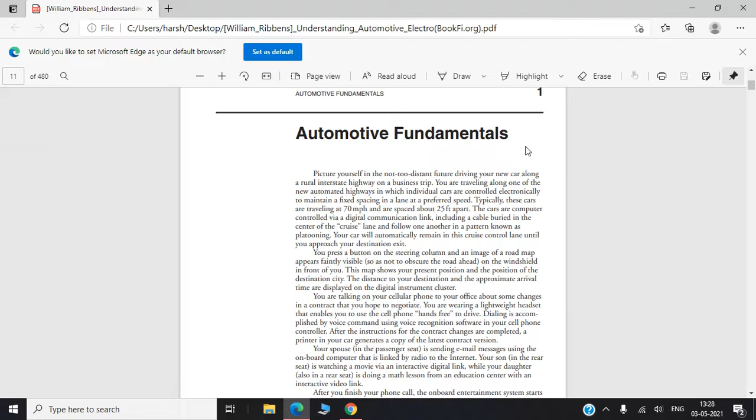So the first part is just the introduction and how the car actually evolved. We'll see a small video now showing the evolution of the car, and the first car which was actually fabricated in the year 1886 by Benz - a person named Benz. You must be knowing about the Benz car, right? Mercedes Benz. The same person actually fabricated the first car, and we'll see the replica of the car here, as well as the evolution of the car from the first car till the latest modern car.

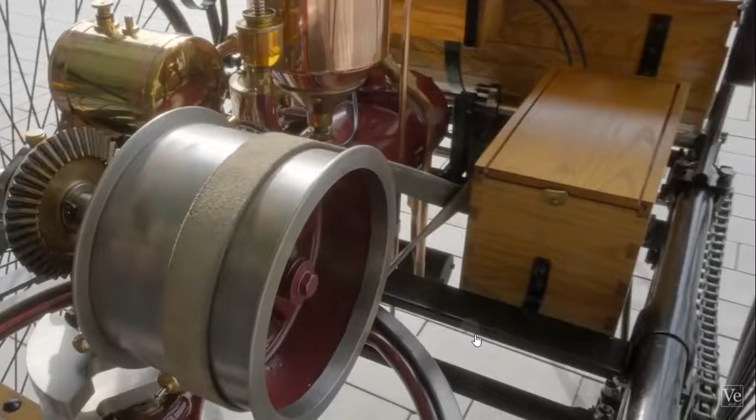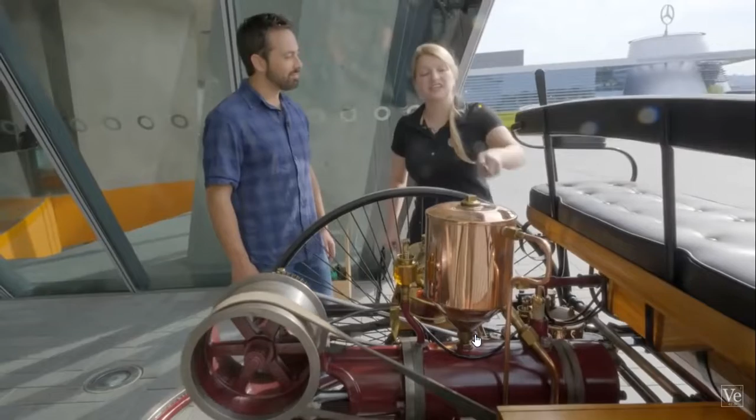Invented by Carl Benz, patented in 1886. Of course, this is not the real thing - this is a replica, because the first model didn't survive. To make a video about car safety - right, there's not a lot of safety here. Safety would come later. As you can see, it is almost like a carriage - I'm myself driving the world's first motor vehicle. When he made his patent, what did he call this invention? Patent motor car. This is the gasoline tank. The only place in Germany where you could actually buy Ligroin or gasoline back then were pharmacies. They sold it not as a cough medicine, don't worry - they sold it as a stain remover, a washing agent. In Germany there's still the word Waschbenzin, washing gasoline, but no one really knows why it's called like that. Benz had a real thing for safety - his ignition is a really modern one, because inside there's a battery, which was fairly new back then. And of course, igniting the gasoline oxygen fumes with an electric spark is much safer than if you try to ignite the whole thing with a lighter. Let's say the most important part is the cylinder with the piston, and the piston moves front and back.

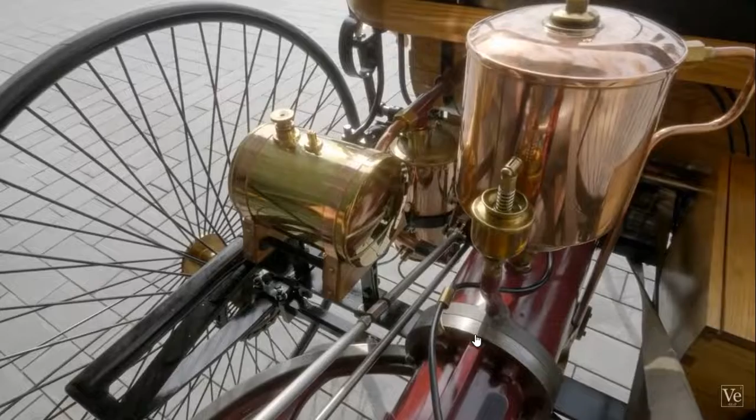This is the piston here, which is still there in current automobiles. And of course, what's really important is the oil reservoir. Lubrication is really important, because everything's open here, so all the time you lose a lot of oil.

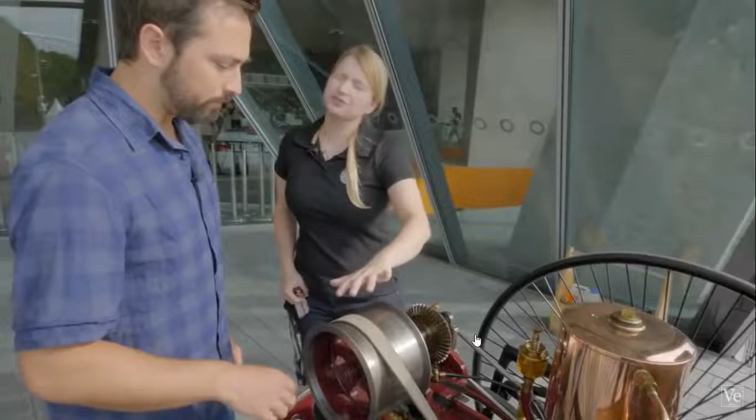And for my colleagues, it's always a big fuss cleaning this up. This is the drive belt. It's not just a drive belt, it's also your brake. It's leather, so if you brake a lot, you get problems with the leather band. The flywheel here, we need for the ignition, to start it. So this is how you started it. Nowadays we have a button as well as a key, right? So this is how the first automobile was started.

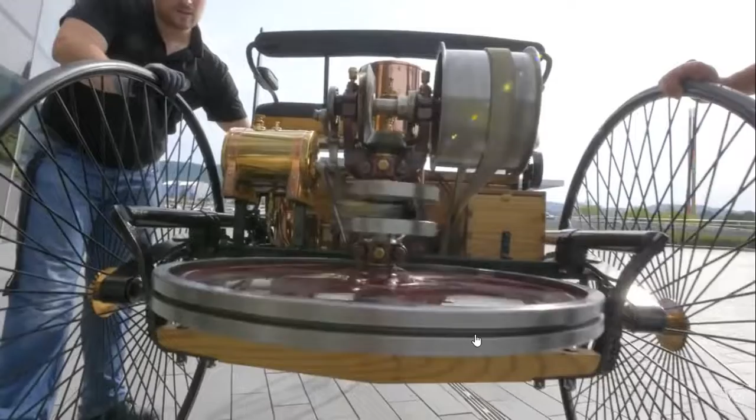Okay, see, that's really simple. We don't have a lot of stuff here. There's just the steering crank, and this is our gas and our brake. Okay, you're moving us into gear? Whoa, this does feel fast. Oh, it even goes.

There was no protection, no safety at all. The top speed of this vehicle was about 16 kilometers per hour, or 10 miles an hour. We can go fast. It feels faster than I was expecting.

This is the Mercedes-Benz museum. The first car was in 1886. Just 16 years later, this car could go 80 kilometers per hour. The second came in 1902 and could already go... by 1928, cars had gotten incredibly fast, reaching speeds up to 192 kilometers per hour.

This car right here set a record of 432.7 kilometers per hour. That's almost 270 miles per hour. And another driver trying to beat that record died the same day. To this day, no one has beat that car's record on a public road.

The automobile revolutionized transportation. It allowed people to travel faster than ever before. But that also created a really difficult physics problem: if you're moving fast and you need to stop or you hit something, you have to decelerate incredibly rapidly, and that creates huge forces on the people inside the car, causing injury and sometimes death.

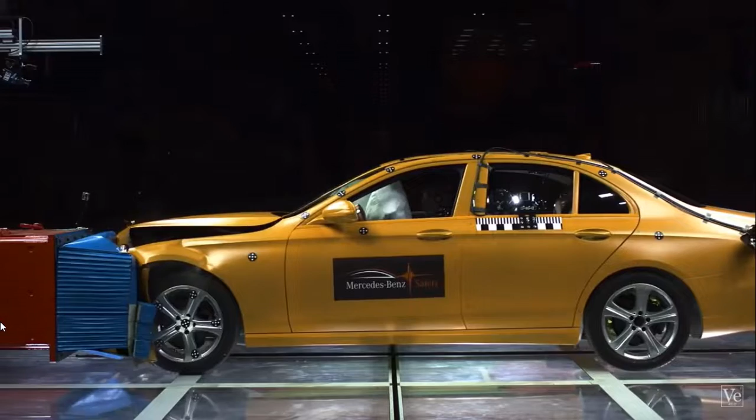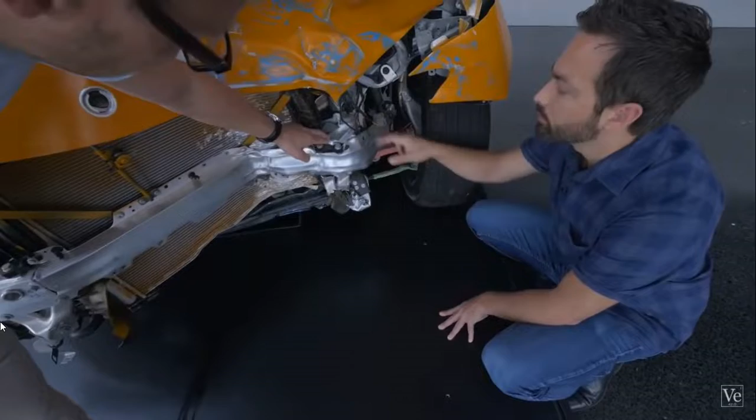This vehicle has done a 64 km/h crash, frontal impact, against a deformable barrier. This is what we classically call the crumple zone. But it's this beam here that's designed to crumple? Exactly, so this takes away a lot of energy by crumpling. The passenger compartment itself is designed with different steel qualities, high strength and ultra high strength materials, so that it gets stiffer and stiffer the closer you get to the passenger compartment.

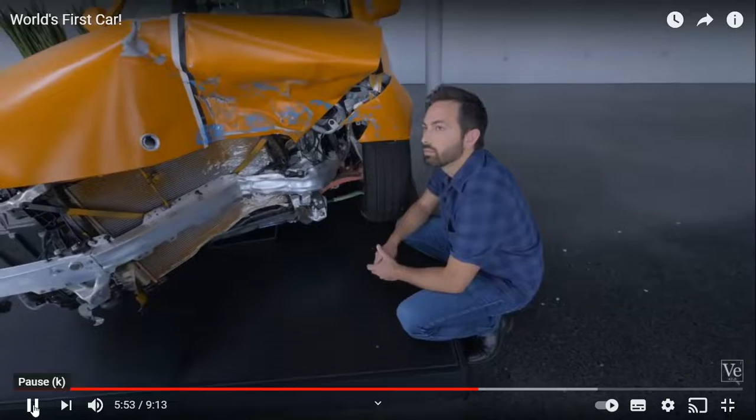One of the biggest challenges for car safety is Newton's first law, which states that whatever is moving at a constant speed will tend to maintain that speed. So if a car hits something, the people inside maintain their constant speed, fly through the windshield, and suffer a very high deceleration when they hit the road.

This is why seatbelts are so important. They ensure that you stay in the vehicle and decelerate with it. When seatbelts were originally introduced, they were an option you could pay extra for. But once we realized how useful they are and how they save lives, they became standard, and now they are mandatory.

Airbags were made available by Mercedes-Benz for the first time in a series production car in 1981. Again, the idea is similar: in a head-on collision, you want to stop the driver's head from accelerating too fast into the steering wheel, and that's what the airbag does. It allows that acceleration to take place over a larger distance and therefore at a lower rate, which helps preserve the driver's head.

What you can also see is this tiny gap here - you can barely get your fingers in between. So that steering column has collapsed. Exactly, and it has collapsed in a designed way. After you reach a certain force threshold, the driver basically pushes away the entire steering column, including the airbag, by taking away energy.

What you want to do as an engineer for restraint systems is connect the driver, passenger, and occupants as tightly as possible to the car, in a way that gives you the most time to decelerate. Seat belts, crumple zones, and airbags are all passive safety features - they're passive in that they assume a collision is occurring and they're just trying to reduce its effects.

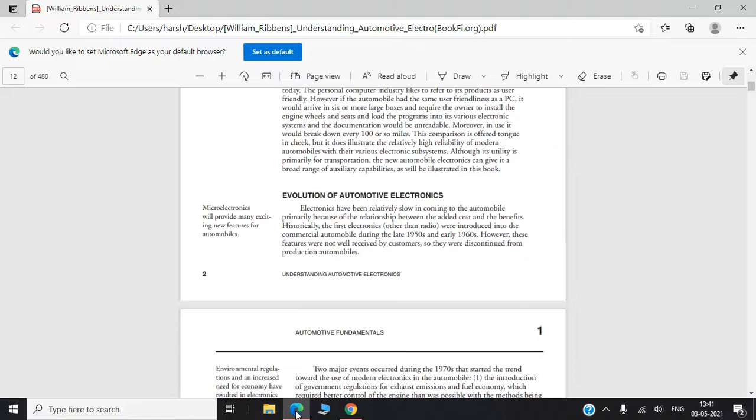Now we'll see the evolution of automobile electronics. Electronic engine control for minimizing exhaust emission and maximizing fuel economy, instrumentation for measuring vehicle performance parameters and for diagnosis of onboard systems malfunction, driveline control, vehicle motion control, safety and entertainment or navigation control. All these things employed electronics.

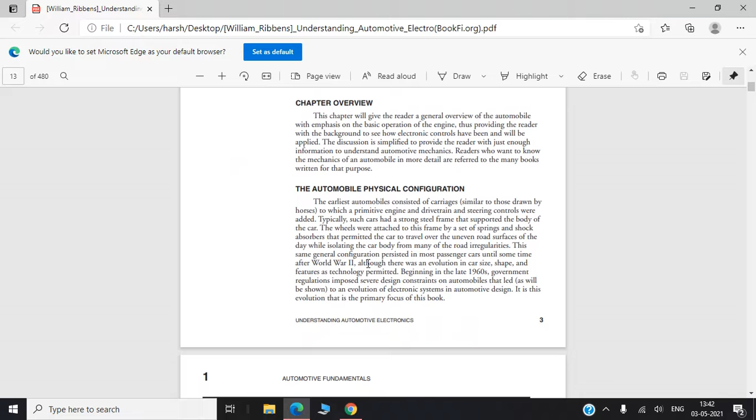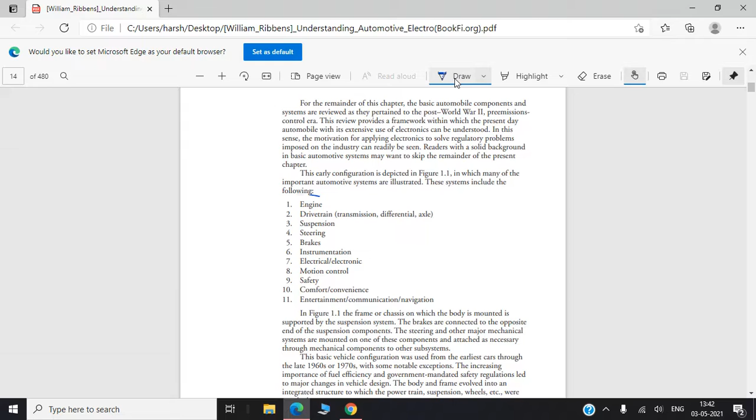Next, we will see the chapter overview, which is the general automobile physical configuration. An automobile consists of all these components, which is very important even for your exam point of view. All these things we'll be studying in your entire syllabus.

First is the engine, which is the heart of the vehicle. Without the engine, the vehicle will not start and will not move. Next is the drivetrain. Whatever power is generated from the engine has to be transferred to the wheels, so that job is done by the transmission or the drivetrain.

Next, when you're traveling, you need a smooth ride, not a bumpy ride. So to avoid all the bumps on the road, suspension is used. Next is the steering column or steering system, wherein you have to steer the vehicle to whichever position you want. That is done by steering.

Next is the very important part of the vehicle, the brakes. When you're moving fast, you need to stop the vehicle also for safety as well as to avoid collision. So brakes are very much important. Next is the instrumentation panel, where you will be seeing all the gauges.

Next is electrical and electronic components. Next, motion control, safety. Safety includes your seat belt warning, your airbags, and even collision avoidance radar system and other things. Next, comfort or convenience, and entertainment, communication, navigation systems.

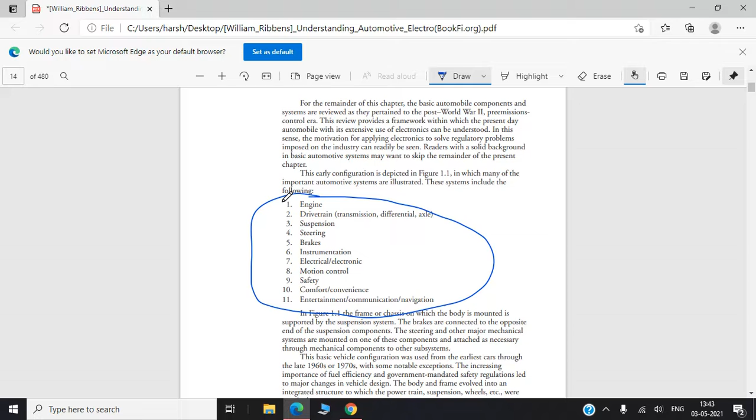All these things have actually evolved over time. Now, how does an actual vehicle look? This diagram is very important, they will ask it for 10 marks. So what is the actual system configuration? What all does a vehicle or a car consist of?

The first one is the chassis. As you can see, this line over here, can you see this line? This line, so this is a chassis. Chassis is nothing but a platform wherein you start accumulating, or start installing other components.

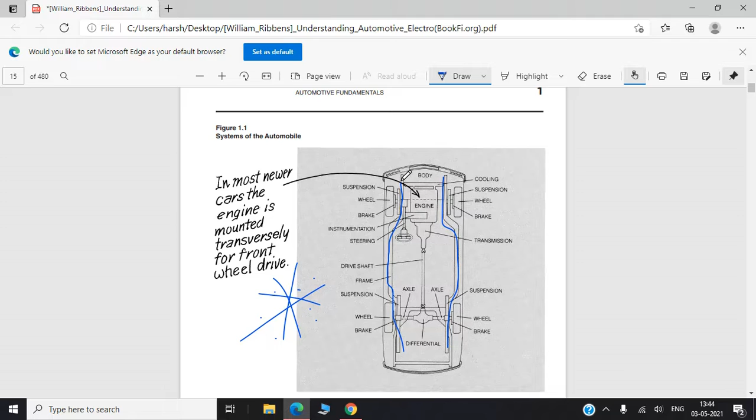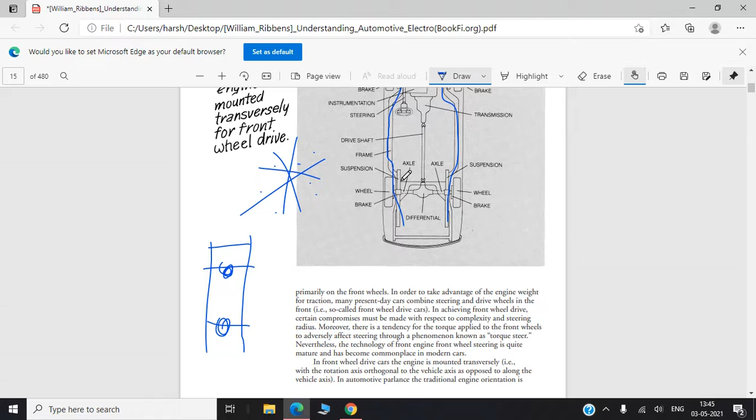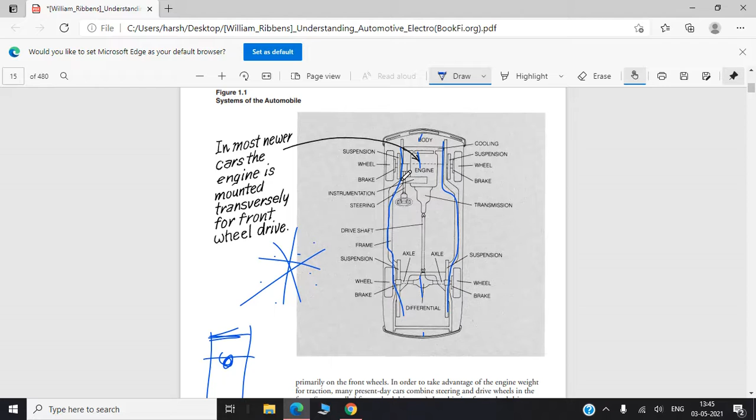Here there will be the engine. On this part there will be the differential or the drivetrain, and this will be the crumple zone for front and back, where the body will sit. You can see this 1, 2, 3 and 4. One second, let me erase this off so that you can see.

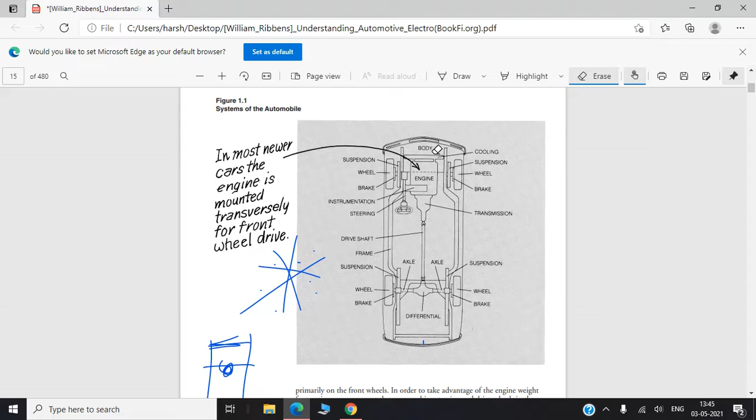So first is the chassis. Second is the main part, that is the engine. Next is the drivetrain, where the power of the engine is transferred to the wheels. Next is the suspension system, where you cannot see it here clearly, but in the next topic you will be studying about suspension.

Next is also the brakes, and the entire body itself. That is called the cabin, or the place where the actual passenger will be seated. So this is the physical configuration of the car, which is very much important.

I'll be going through what is the differential, drive shaft, the drive train, how it works. There are two types of engines, and two types of transmission also - one is automatic transmission and one is manual transmission. How it works, we'll go through it, it is there in your syllabus. Regarding the brakes also, there are two types: disc brake and drum brake, and how both of the brakes work we'll be going through it.

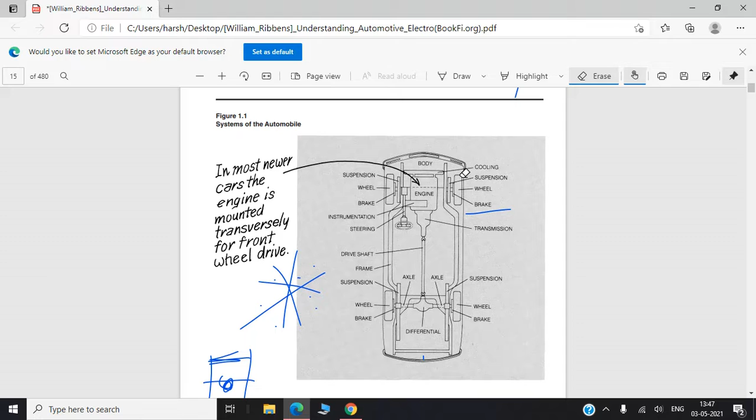And suspension, there are different kinds of suspension nowadays, but in the earlier time there was only either a shock absorber, or a shock absorber with a spring, or something known as leaf suspension. Now it has evolved to electronic suspension, independent electronic suspension, and various other types. So we'll be going through all these things.

So next topic will be the engine. This is how the engine actually looks like. You can see this here - this is the whole part of the whole engine. I'll just zoom it a little.

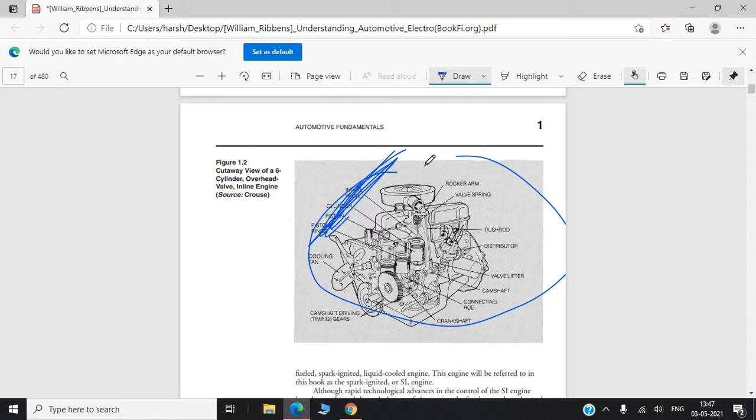Which you need not have to draw, don't worry about it. It's only for your understanding.

So the main parts of the engine is, first is the piston rods. These are the pistons, 1, 2, 3. Depending on number of pistons, the entire engine is called either a 3-cylinder engine, 4-cylinder engine, 6-cylinder, or 8-cylinder. Even 12-cylinder engines are also there. Most of the cars nowadays which you are driving is either a 3-cylinder engine or a 4-cylinder engine. And this one is a petrol engine.

How can we say whether it is a petrol engine or not? Because there are spark plugs in it. There are two types of fuel which can be used in the engine, and two different types of engines are also there. One is petrol engine, one more is diesel engine, and nowadays the new engine is the electronic engine, for your electric cars.

So you can see this, near the piston here there is something known as a spark plug. We'll be studying how the spark plug works, and the spark which is provided to it is from something called the distributor. See, these are the spark plugs here, and this is the distributor which distributes the spark evenly for all the cylinders.

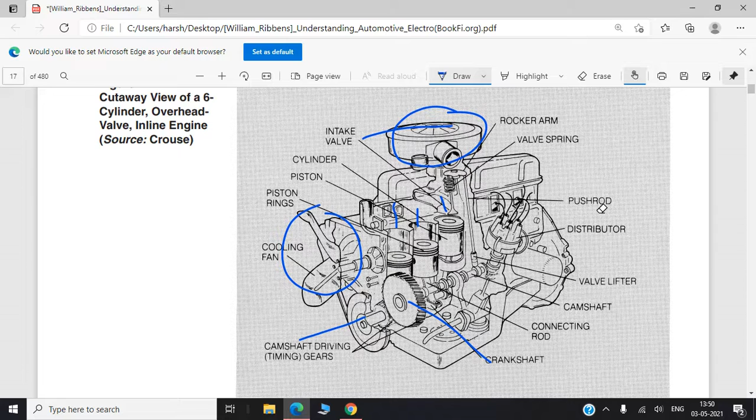Now, first one will be - I'll just stop it over here. I'll just give you the basic blocks of your entire vehicle.

So the major components of the engine includes, first is the engine block itself, next is the cylinder which I have already informed you, next is the crankshaft, next is the piston, the connecting rods, camshaft, cylinder head, valves, fuel control system, ignition system, exhaust system, cooling system and electrical system. So these are the 13 major components of the engine.

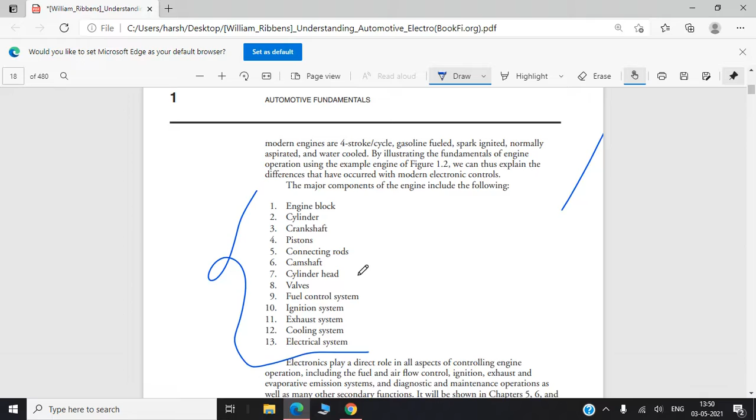Next is the engine block. In the engine block we will be having the 4-stroke cycle. I'm sure you guys have already studied this in your first basic mechanical subject, but still we'll go through this in the next class. I hope you have understood the basic concepts.

Before I end the class, I'll just go through one more video, the evolution of cars from the first car to the Tesla electric car. We'll go through this once and end the class.

This was the first car, in 1886. It was a gasoline car, to be very precise, found out by Benz.

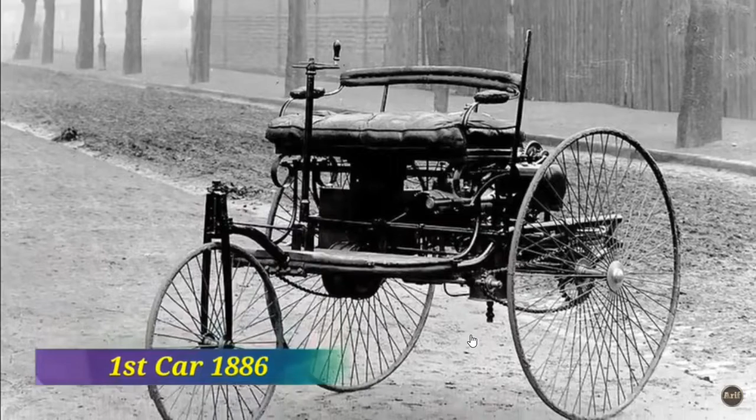After 1886, in 1900, this was the car which actually came into production and was on sale for commoners.

In 1910, as you can see, there was no windshield or headlight in the previous vehicles. Here in the evolution, you can see the headlight, and this is how you start the engine.

In 1920, every 10 years you can see changes. There is a top, a windshield, lights, basic comforts, and a spare tire also.

Next, in 1930, that's after 10 years, you can see a hard top. You had basic amenities like AC and seat belts, everything by 1930.

In 1940, this is much like a family car. Everything was inside these bonnets, and the rear spare tire was placed in the trunk or dicky. From 1950 onwards, racing cars emerged, and more modern or modified versions of the vehicle evolved.

In 1960, airbags were also introduced. But in India, we are only seeing airbags within the last 5 years. In Western countries, from 1960 onwards, airbags as well as seat belts are mandatory.